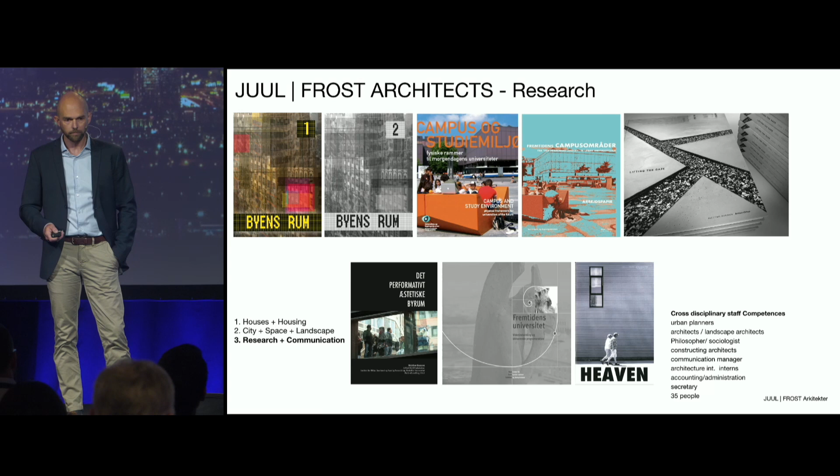Based on our different research projects, we have a working methodology which we put onto every project, whether it's a small project or a large project. We make sure that in every project we look at it from the city scale, from the neighborhood scale, from the individual space. For each project, we monitor the added value we put into the project, or how we want to prioritize between different fields of added value, because you cannot have everything at the same time every time. And then we use different optics in the project.

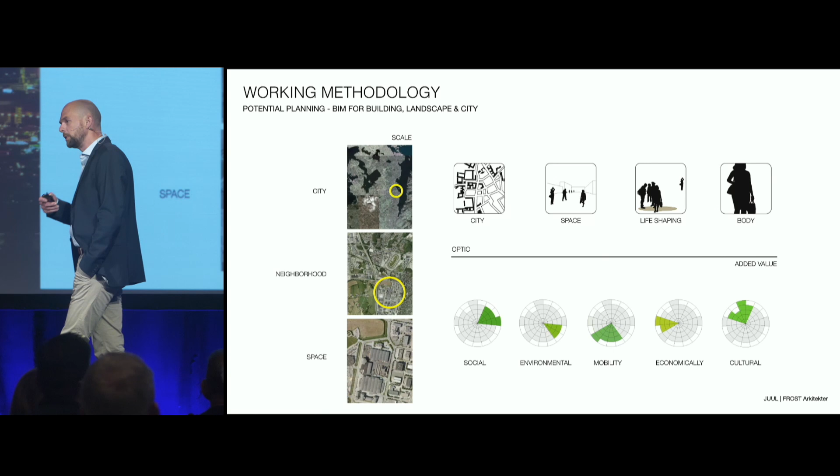We use a city optic and we use a space optic. I don't think that's different from what many of you do. But we also look at what we call life shaping, the lives that's going to be lived in the projects we're working with. And we also look at how we possibly can affect the bodies of those people living, working, staying in the spaces we design.

To be able to have this in every project, we've figured out that having a BIM approach helps us a lot, because then we can get our feedback from the projects easier. I would say that we do BIM in the city, BIM in the landscape, BIM in the building. For JUUL FROST Architects, BIM is in the heart of every project, and for us, people is in the heart of BIM in the projects.

When we do the projects, people is in the heart - then it's ourselves internally in the project. And when the project is finished, then it's the people staying there being the heart of the project.

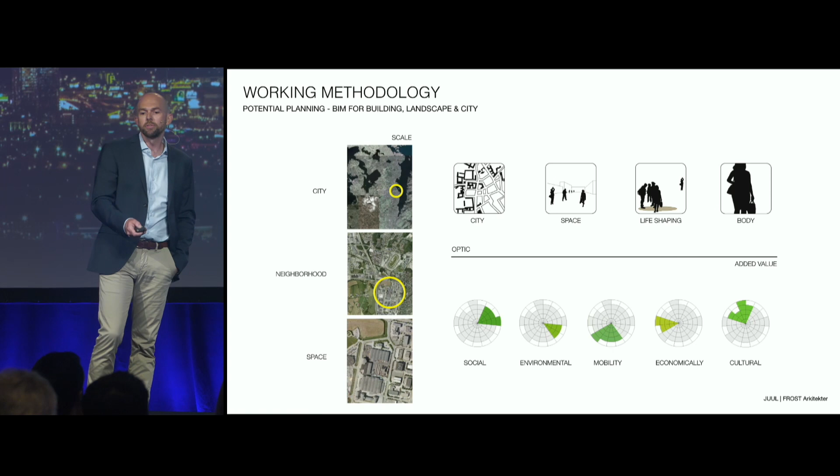So I would like to share a story with you. Me and my family, we live in some small row houses in Copenhagen. We live 5 people in 100 square meters. And you might think that's a little, but it's actually a children's family ghetto. So it's very easy to just let our kids out and they go find their friends, and we make new friends.

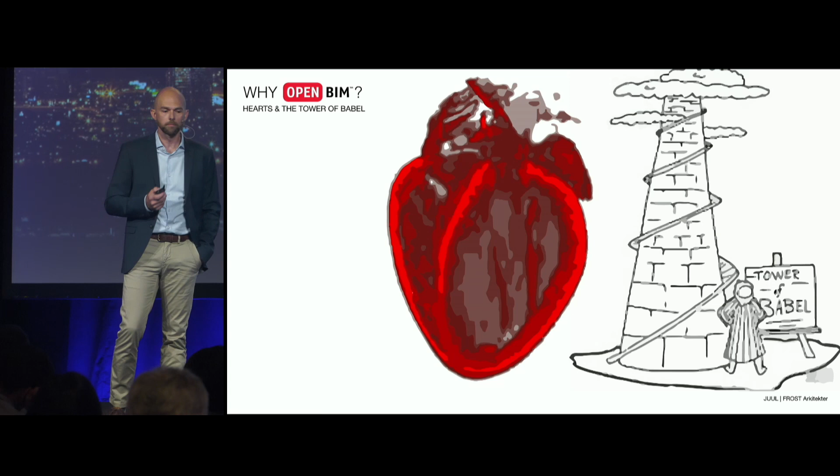One of these friends, one of my neighbors, he's a medical doctor. Our children are the same age, so quite often we help each other picking up each other's kids from school, and quite often we eat together at night.

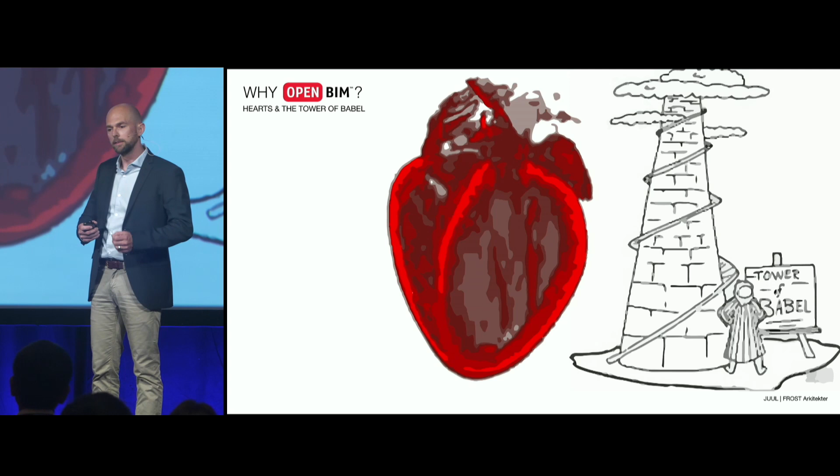And when the children have eaten and left the table, and we sit back, we pop another beer and put our feet up and talk about everything we've been experiencing in the days.

And my neighbor, he's a medical doctor. His day job is standing at the head end of people being very sick, and he is looking right into their open chests. I think he has a cool job. He's saving lives every day, and I've been quite impressed with that.

So this one night I told him, he's called André, 'André, I think you've got the coolest job of the two of us. I think you're making the biggest difference.' I said that because that day I'd been to a construction site and had a huge argument with one of our builders who wanted to do one of the details differently, and he couldn't see the consequences for the entire project. I was just like, why are we having these discussions? So for me that was irrelevant at that time.

Then André said to me, 'Morten, when I come to the patient, as a doctor, a process has begun in their bodies, and all I can do is delay that process. Sometimes I can delay it with years, other times it's just a matter of minutes.' Then he looked at me and said, 'Morten, you on the other hand have the important job, because you're shaping the spaces, the areas where people are going to live. You're making the frames for where they can be healthy if we do it the right way. You're making spaces where people are being educated so that they're not going to be sick. So that's important.' He took me by surprise, and I said, 'oh yeah, that's right.'

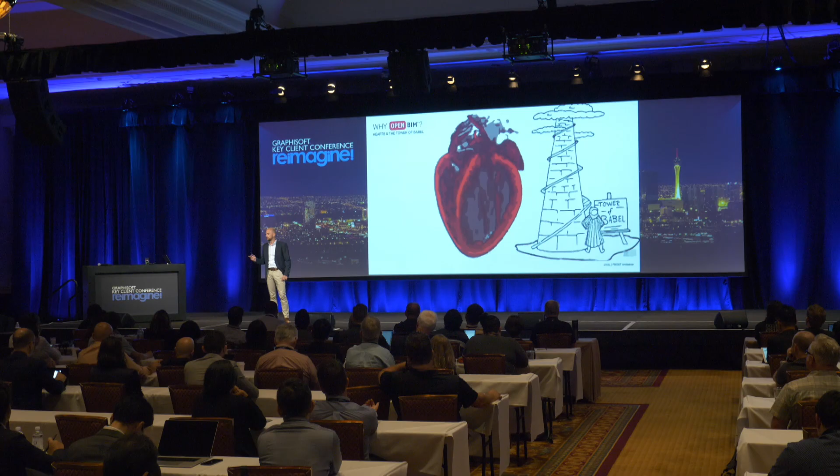And this thing about everybody talking different languages - I think that is sort of like the story about the Tower of Babel once again. But we are in our time so lucky that we know about dictionaries, so we can translate. The only ones we can't translate are those people talking in code language, and they can have a club for themselves and have their dark side. But those dictionaries, they need to be open. That is why we need open BIM, open standards.

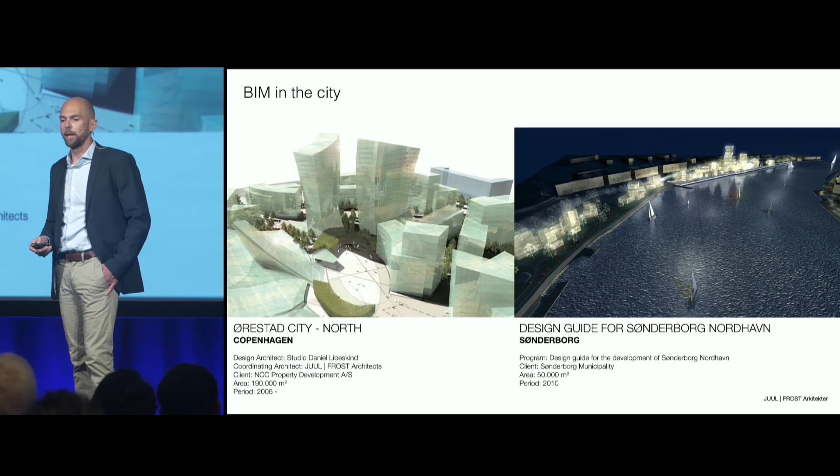Okay, very fast - we do BIM in the city. The project on the left is one of the very first projects we did in BIM, actually part of why we chose to go the BIM road. We were chosen to validate a project made by Daniel Libeskind in Copenhagen. The other one is a master plan we did on the basis of a Frank Gehry project.

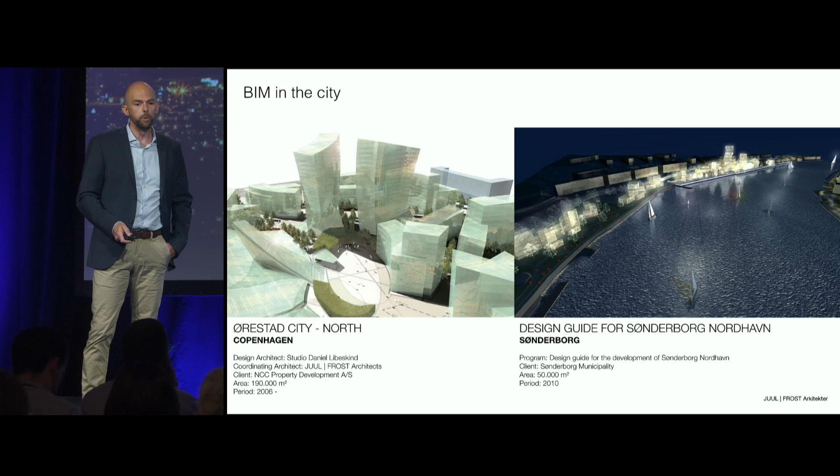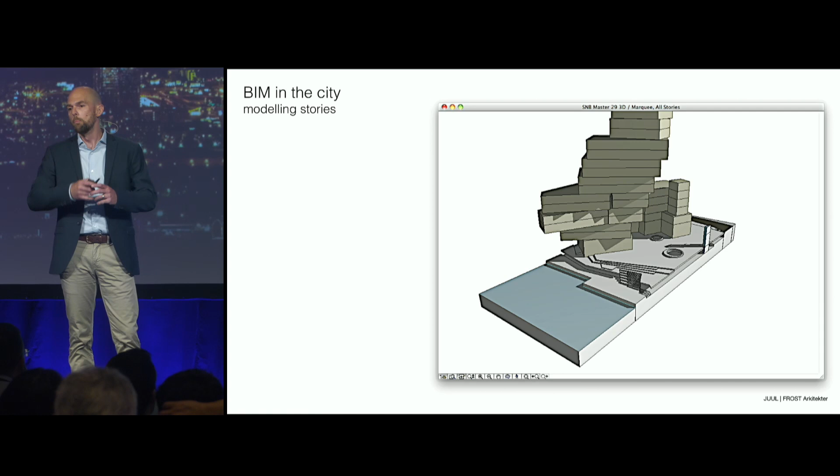The reason I'm showing this is that to be able to do BIM in the city, we need to think about the tool differently. For example, we do not have a story tool, so we're using slabs to model stories. This gives us the advantage that we've modeled the geometry, and from that geometry we can very fast have simple quantities. That's not new for any of you, so I'll just go fast through that.

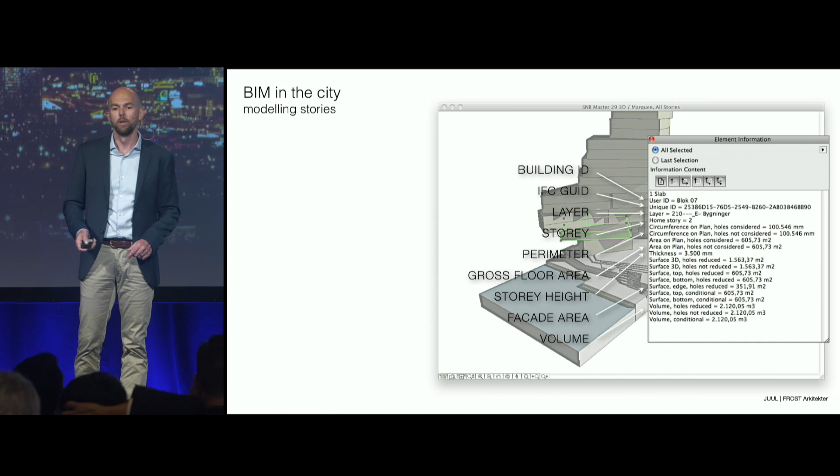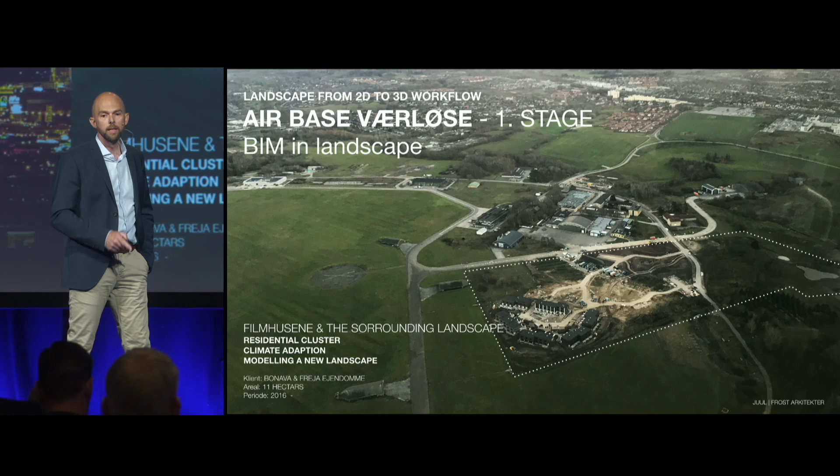I want to use a little bit of time talking about the old airbase just north of Copenhagen. This is a landscape project. We started by winning the building project and persuaded the client that we should also do the landscape project.

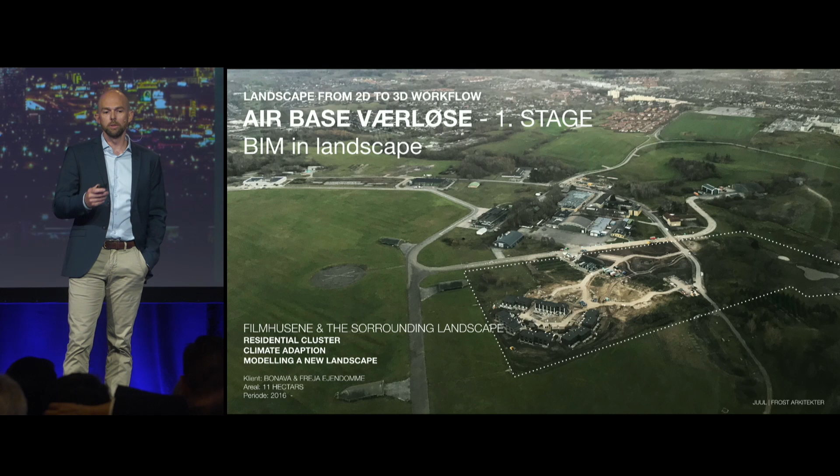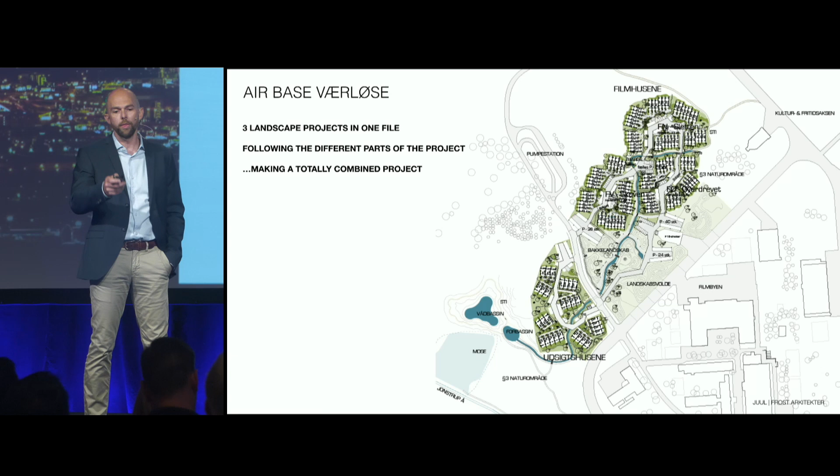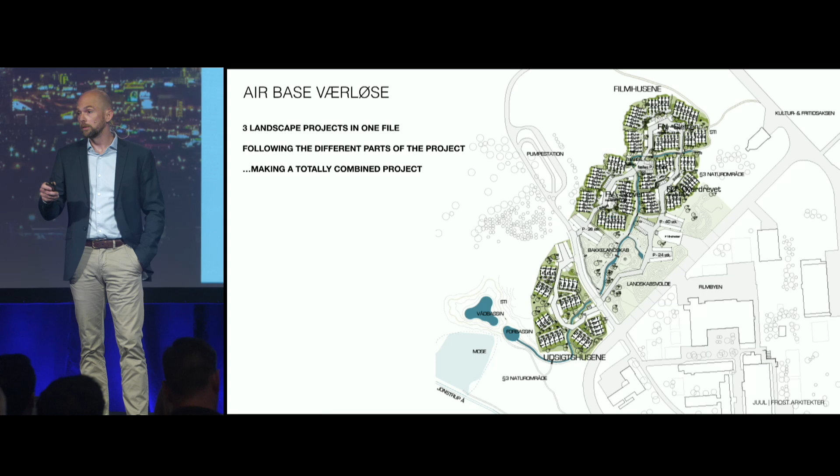Let's go here. So you see there are 3 clusters of row houses on the north, and 1 cluster down to the south. We started by doing landscape in the northern part, then we got the southern part, and then our client thought we did so well that they gave us the middle part as well. For this project, beside the building file, we have 3 landscape projects in the same file.

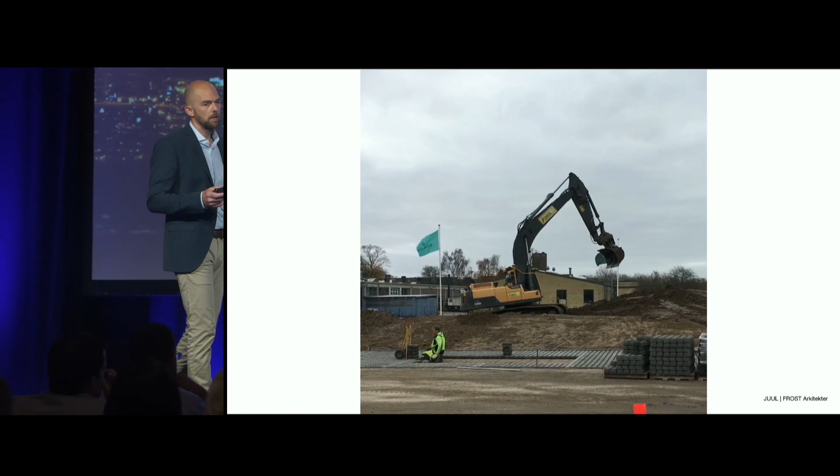I'll just show you a short video. We were given the task to keep all the soil in the same plot, and we had 8,000 cubic meters of soil, which we modeled in ARCHICAD. When we came out there, we could see these huge excavators just digging based on our geometry. The contractor took our model into the machine, and I think it's so fascinating. They also told us that this is not a new technology - they have been able to do this for the last 10 or 15 years. They just didn't have any geometry to put into their machines.

We started by, we were given the amount of subsoil from the client, so we modeled that and made sure that we only used what we were given of subsoil. And throughout the phase, the contractor figured out that there was more soil than they had known in the beginning, so we had to do another check.

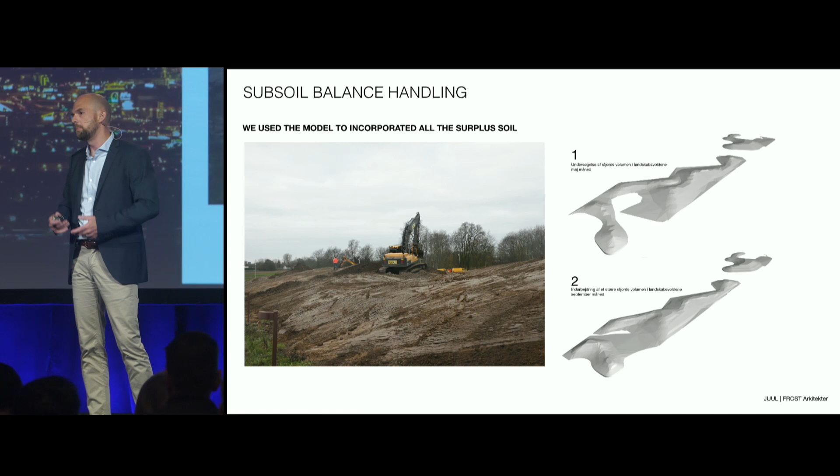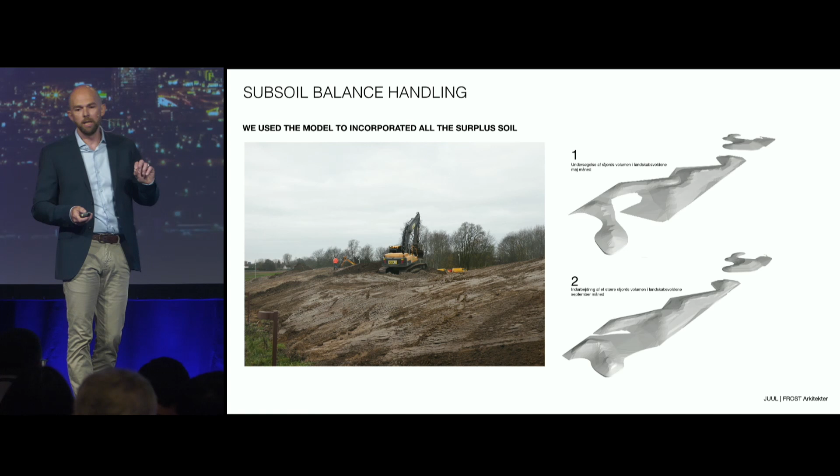Because we had it modeled, it was easy to make sure that we didn't use too much. Actually, the difference from the ARCHICAD model to the real world is only 200 cubic meters. You might think 200 cubic meters is quite a lot, but compared to the 8,000, and considering that soil gets loosened when dug up so you can't figure out how compressed it is, we think a margin of 2% in this scenario is actually quite good.

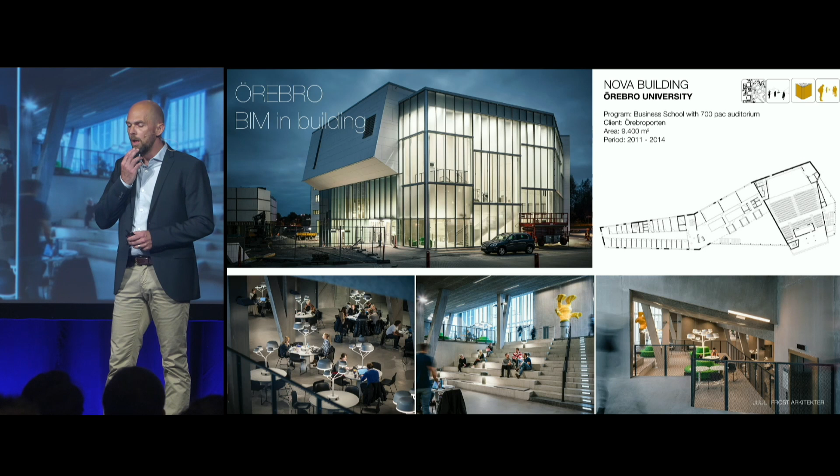This project is my pet project. It is the project where we were awarded the Building Smart Award. It's the best building process I've ever experienced.

And I think that's partly due to the client. The client very quickly decided that this project should be an all-the-way BIM project from beginning to handover. That was one thing. The other thing was that he made it a partnering project. To begin the partnering project, he gathered all stakeholders, not just the bosses of the companies, but also the guys doing the modeling. So on the second day, we did a BIM seminar, testing and trying and learning to know each other.

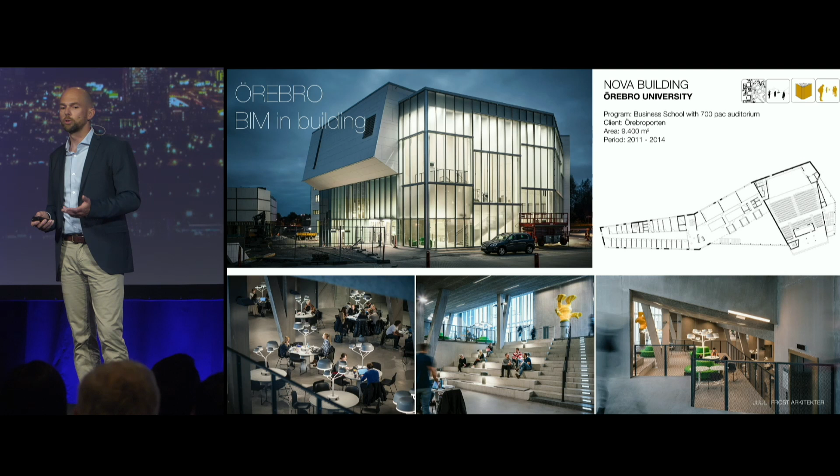For this project, as architects we used ARCHICAD. We had Revit in the project, MagiCAD, AutoCAD, MEP, Tekla. We used Solibri to combine the federated model.

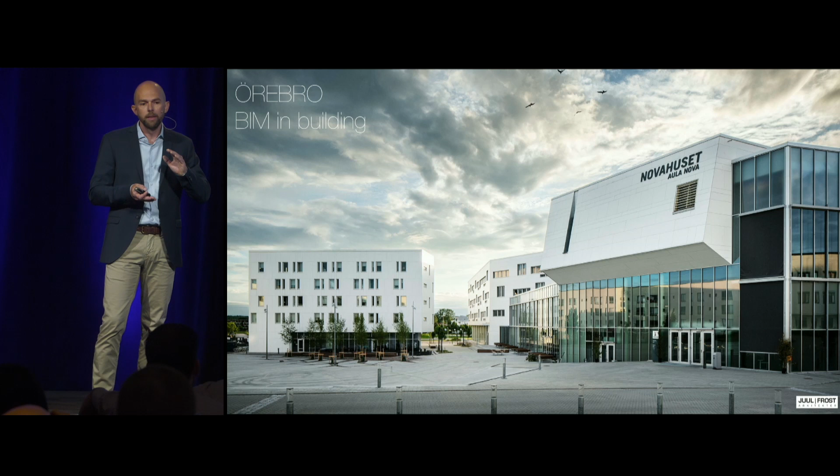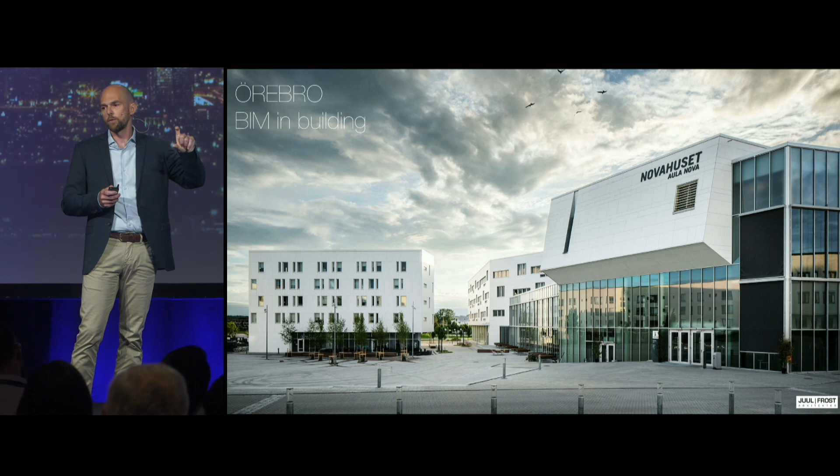We learned that you can get very many issues in a Solibri model. But if you take them into a really huge Excel spreadsheet and start sorting them, you can very fast get them organized. We gave each consultant 10 issues they had to fix by the next time, and they had to do that throughout the project. So the amount of issues went down really fast.

I want to show you this video. It's made by BIM Equity and Solibri. In the video, you should notice this guy, Ulf Venlöf. He is the contractor, the client on the project.

When we design, it's not only architecture as a building, it's this total frame which actually makes the project for us. It's landscape, it's urban discussions, and of course our design of an architectural frame. The NOVA project has for us been a relatively complex project.

Therefore it has been an advantage to be able to do our own quality assurance with the Solibri model checker. I've been in this building industry since 1976, and this is the smoothest process I've ever seen. The open space, I love how much air there is in here. I like the bright lights, the big windows, and the atmosphere.

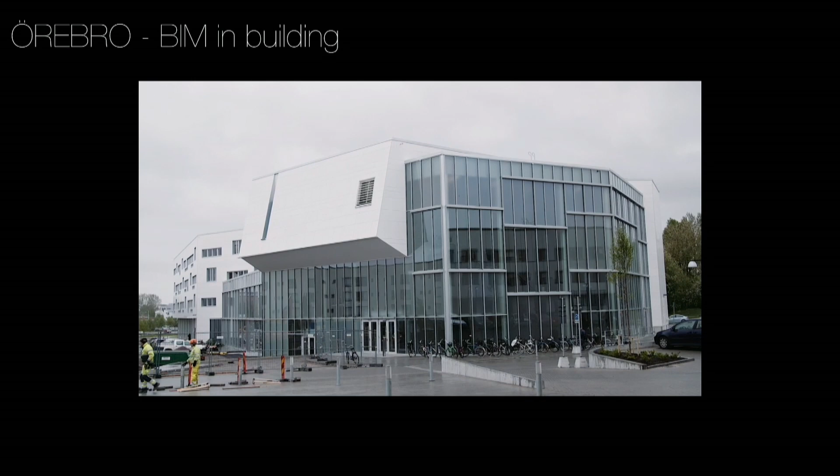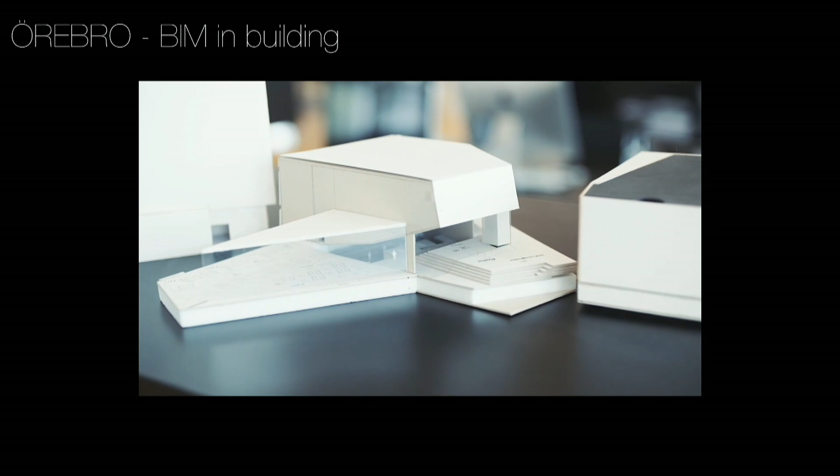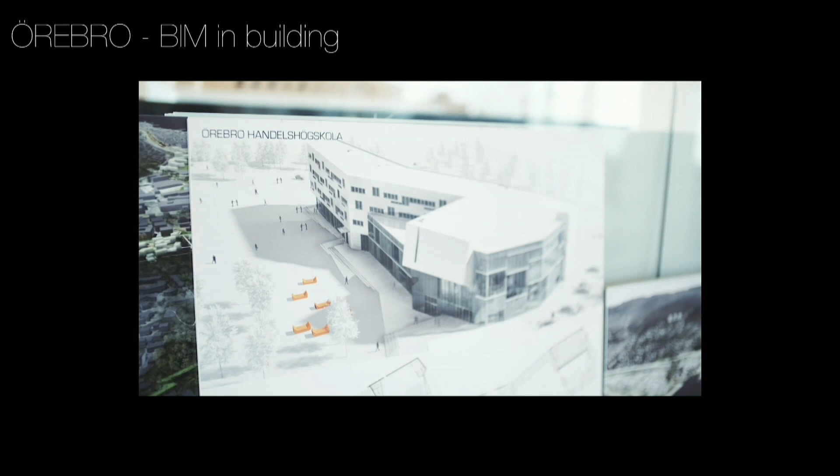For us, it's very important that we can work out a project from Copenhagen abroad. From the architectural scheme to realization is happening through these BIM facilities, running the whole project from Copenhagen. Actually, it's the first time I've seen the MEP technicians use the Solibri model on site. By coordinating the models in Solibri, we got a better quality check all through the process. Using a BIM process gives us the advantage of having a digital model containing the information for the building process. It makes it easier for us to collaborate internally, and having the model, we can share it with other consultants on the same project, as well as incorporate their models into ours.

Ulf saved 3 months of planning time for installations. This guy has been planning building projects since '76, and he saved 3 months of planning time — 1 million Swedish kroner.

Looking a little bit into the future, we think that we're looking at a future. I thought it would be a future with hard hat heads-up displays, but I can see that now it's something you're doing in the East, at least having HoloLenses on the construction site. I think it's straightforward — I think we'll see logistical robots moving materials on site, cranes automatically moving things, or drones moving things on site.

And that had us asking, how will this affect us as architects? I think it will affect us in that we just need to do better models, because the models are the basis for the other technologies. That's why we've begun to look into linked data to represent the models. Time really runs fast. Thank you for listening.